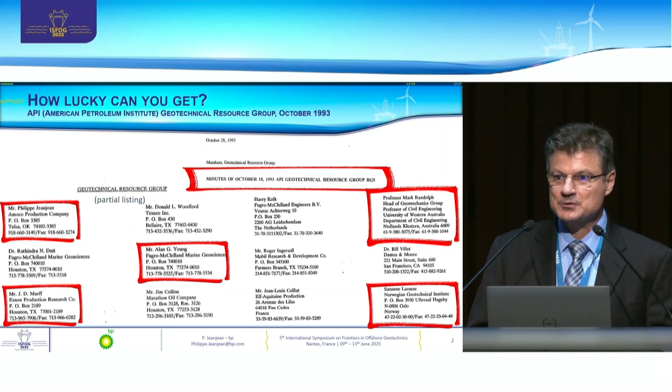So when I look back at my career, I realize how lucky I've been. You can see here a partial listing of the API Geotechnical Resource Group from October 1993. And here I was, 2 months into my career, sitting in meetings with Don Murff, Alan Young, Mark Randolph, and Suzanne Lacasse, who would all go on to be Terzaghi and/or Rankine and/or McClelland Lecturers. So it was really a wonderful learning opportunity.

I never worked with Mr. McClelland. It was a little bit before my time, but I'm proud to say I've worked closely with all the previous six McClelland lecturers. Don I met in 1990, as Phil mentioned, so tonight actually makes Don the first member of a very exclusive club, which is the people that got the McClelland Lecture and whose student got the McClelland Lecture. Mark and Alan I met in 1993, as I just explained. Knut I met in 1994 when he was leading a joint industry project on the design of suction piles. Ed I met in 1998 when he joined Amoco, just 1 week before the merger with BP was announced. And Richard I met in 1999 when he joined the ISO resource group on offshore geotechnics. So thank you all, gentlemen. It's been a pleasure working and learning from you over all those decades.

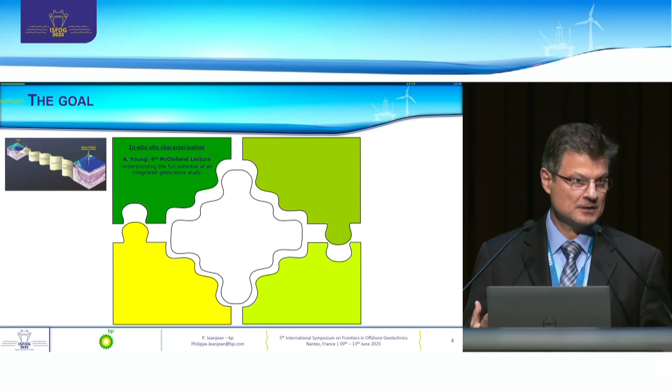So what is it that we do as geotechnical engineers, and what is our goal? In chronological order, we go into the field and do geotechnical and geophysical site investigation. We characterize the sites and take soil samples. Then we bring those samples to the lab and measure the soil properties relevant to our project. With those soil properties, we run numerical and analytical models to estimate the capacity of the foundation. And to verify and calibrate our design methods, we do physical testing, either in the centrifuge or at 1G, but rarely, if ever, full-size foundations with full-size loads.

All those topics have been covered in great detail in previous McClelland lectures. They are proxies for what we're really trying to do, which is predict the field performance of full-size foundations under full-size loads on the seafloor. So a fair question is, how well are we doing? Through this lecture, I will take you through some case histories to show that overall, we're doing very well if we follow the latest recommendations in our offshore codes and standards, although there are cases, as you will see, where we got it very wrong.

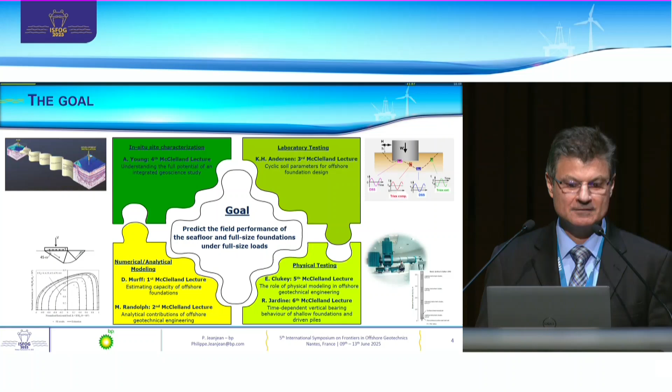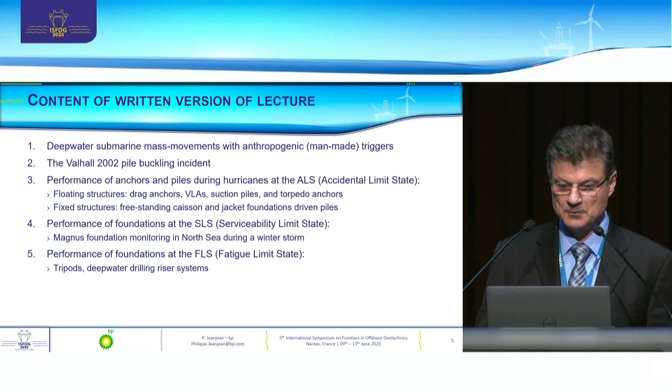This is the content of the written version of the lecture. We will talk about submarine mass movements with anthropogenic or man-made triggers. We'll talk about the Valhall pile buckling incident, and the performance of anchors and piles during the accidental limit state under very large loads imposed by hurricanes, for floating and fixed structures. Then we talk about the performance of foundations at the serviceability limit state, including the Magnus Foundation Monitoring Program in the North Sea. And then the performance of foundations at the fatigue limit state under very, very small loads. We can't cover everything tonight, so these are the topics we'll concentrate on, but there's more in the written version of the paper.

So let's start with offshore geohazards and submarine mass movements. If you look at the open literature, you will find that it focuses almost entirely on natural triggers.

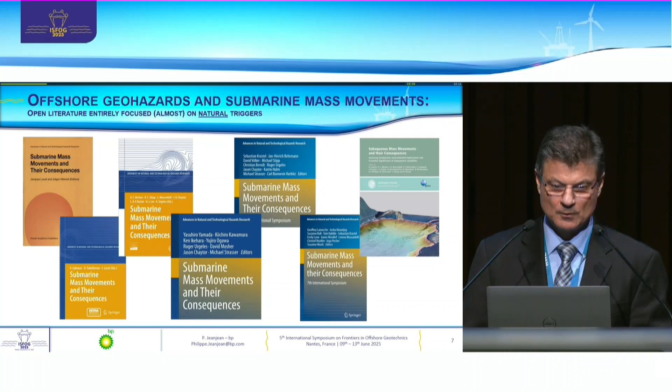Examples of submarine mass movement with anthropogenic triggers are virtually non-existent. So in this lecture, I will walk you through two case records, and the first one has to do with our drilling activities.

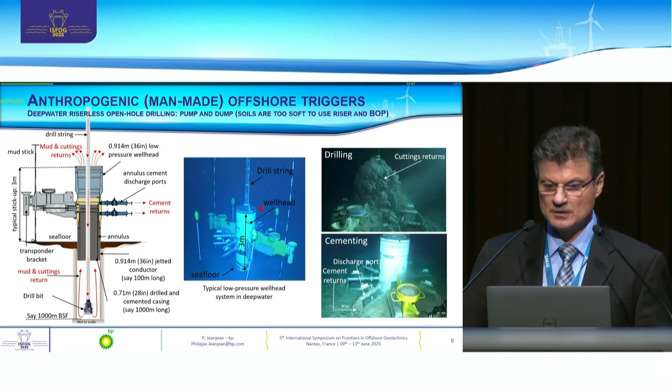You can see here a typical deepwater drilling system used in the shallow section of the well, in the top 1,000 meters, before the blowout preventer and riser are installed. The cuttings are circulated out of the hole by circulating mud in the drill pipe and returning the mud through the wellhead onto the seafloor. When drilling is completed, the casing is lowered and cemented, and the cement is returned to the seafloor through discharge ports. So those volumes of cuttings and cement can be very large.

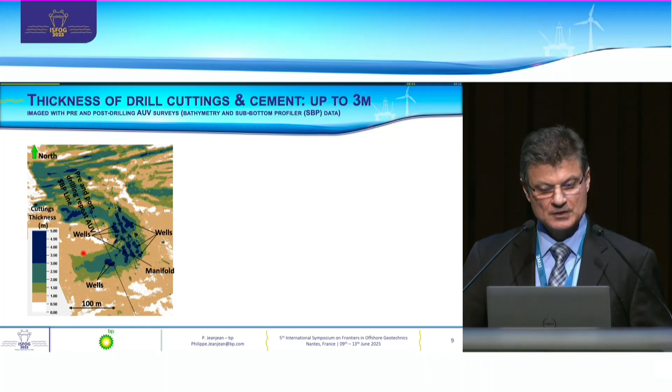So how do we know that? Well, we do bathymetry surveys pre and post drilling, and we compare the elevation of the seafloor, and the difference is the thickness of the cuttings. In this case record, all those dark blue dots are wells, and this is the thickness of the cuttings. Near the wellheads, you can see we have up to 3 meters of cuttings, and they can extend hundreds of meters away from the wellhead.

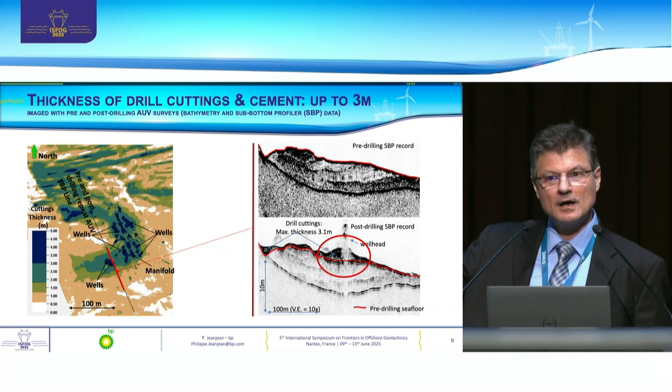Question: can those piles of cuttings be so soft and so high that they become unstable? The answer is yes, and here's a case record. You can see here a debris flow that was triggered by the accumulation of soft cuttings over the wellhead, the seafloor became unstable, and the cuttings ran out 260 meters.

We mapped the extent of the debris flow with what's called backscatter bathymetry data, and you can see here the debris flow is very visible. Locally, the slopes were up to 8 degrees, but it's a good idea to put subsea structures upslope of the wells, just in case you have one of those events.

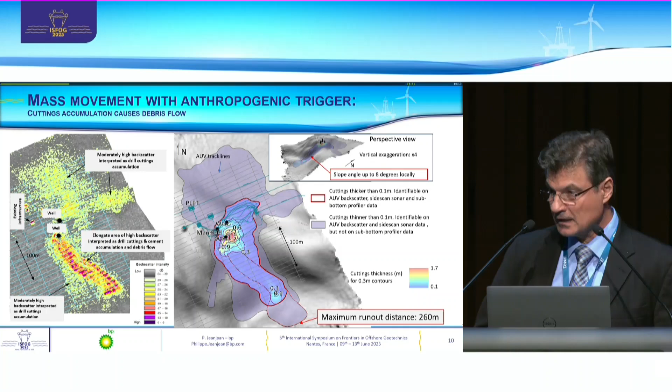We were fortunate, or unfortunate, I don't know, to capture the event live. You can see here a world premiere of a deepwater submarine mass movement with an anthropogenic trigger. You can see the drilling operation, and all of a sudden the seafloor becomes unstable, and the ROV is engulfed into the debris flow, which lasted about a couple of minutes and ran out a couple hundred meters.

If you slow down the video, you can actually see, I find it very fascinating, a cemented block intact being rafted over the debris flow. Here you can see the edge of a rafted block propagating onto the seafloor. Here's another one here.

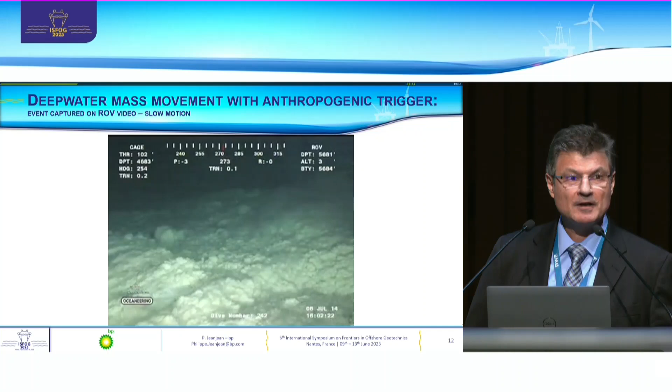Very spectacular, and those events can occur. The second example comes from another deepwater area. You can see the seafloor rendering here, and at first casual glance, it looks like a lot of the seafloor we've seen before. You have a bit of an escarpment, and yes, you have debris flows that have occurred.

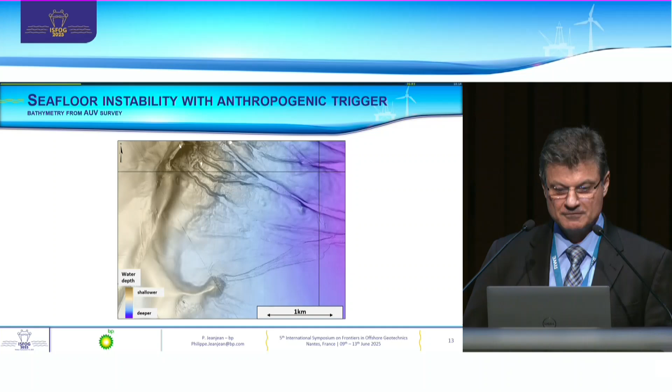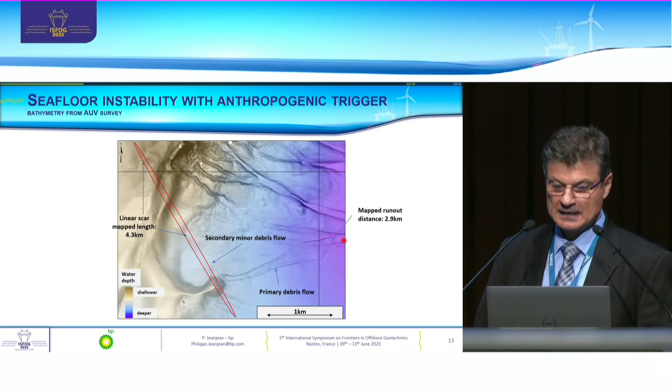But there is a very unusual feature about this seafloor, and here it is. We have this linear scar that we mapped over a length of 4.3 kilometers, but clearly it extends outside the bounds of the survey. It seems to be associated with 2 debris flows, which run out at least 2.9 kilometers. If you zoom in on this feature, you see the linear scar exactly coincides with the head wall scarp of the debris flows. And we don't think that's a coincidence.

We think the formation of the scar is what triggered the debris flow. And we believe that this scar is too straight to be the result of natural processes, and it's most probably of man-made nature.

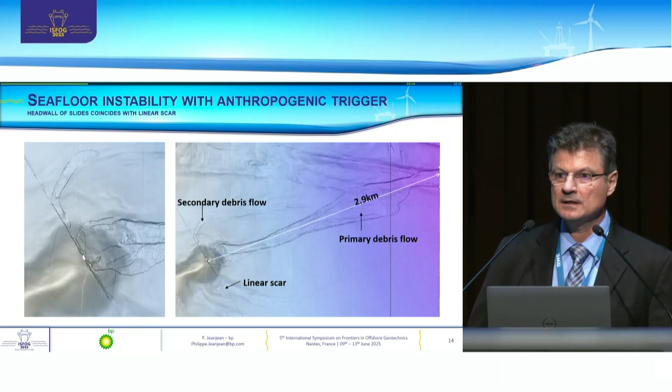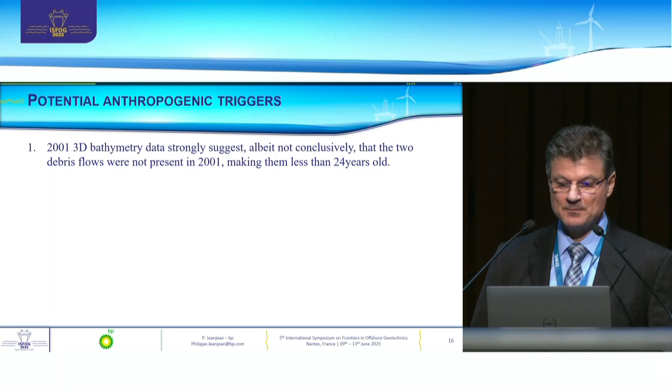So the plot thickens, because we have 3D exploration, low resolution bathymetry data from 2001, which strongly suggests, although we can't be 100% conclusive, that those two debris flows were not present in 2001, which makes them less than 24 years old. So what could it be that triggered those debris flows?

Well, it could be the laying of a cable or fiber optic line, but the scar is too big and too wide for that. It could be the dragging of a survey sled during a deep tow survey, but again the scar is too deep and too wide. In the Gulf of Mexico, pipelines were installed by being dragged along the seafloor, but those operations are well documented and outside the area of interest, so that's not it either. Or it could be the dragging of a drilling rig anchor after the rig broke its mooring, lost position, and drifted during a hurricane.

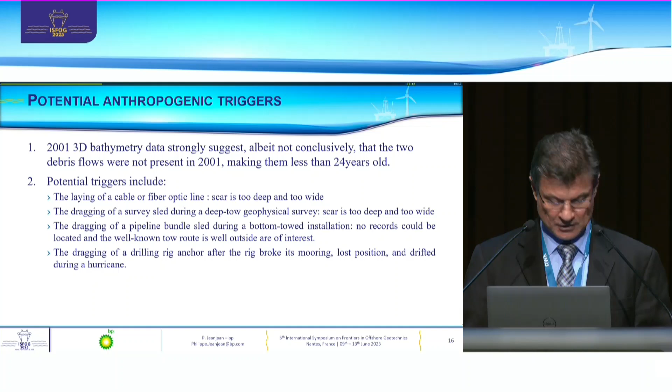So I think we can eliminate the first three possibilities, and that's as much as I can connect those dots together for you. I will leave you to draw your own conclusions.

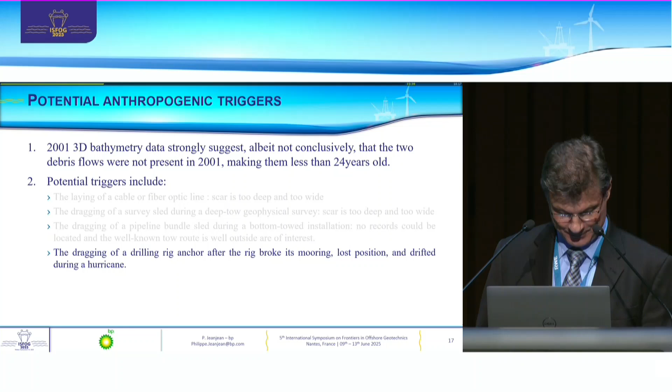So to summarize the bit about performance of the seafloor, we believe that case records of deep water mass movement with anthropogenic triggers are underrepresented in the open literature. They do exist. I've given you two examples, and I think we must have the courage to publish them. Again, they can be related to accumulation of drill cuttings or dragging of objects onto the seafloor. Now I appreciate all those lessons were learned during operations of oil and gas, hydrocarbons, but I do believe they are applicable to new energy projects.

For example, carbon capture projects can include the drilling of offshore wells to store the CO2, so you will have to deal with drill cuttings. Offshore floating wind, particularly in deep water, may have to lay a lot of cables on steep slopes with soft sediments. So you now have an example of what can happen during such activities.

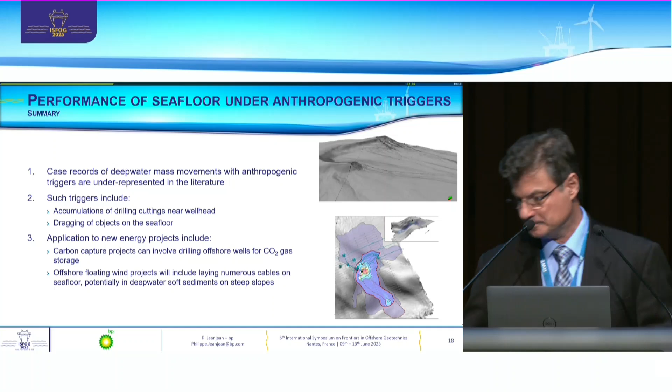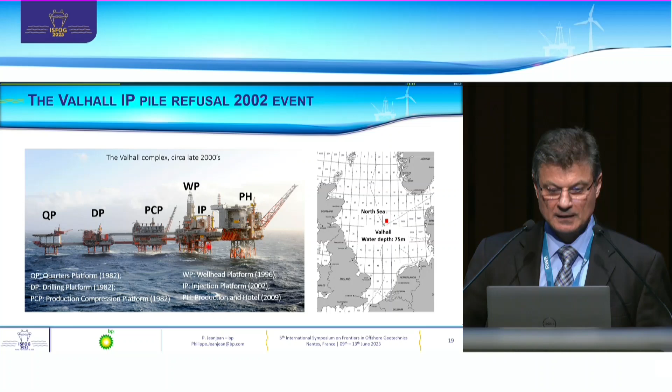So now we will pivot and look at pile performance during installation with the Valhall pile refusal event of 2002. The Valhall field is in the central North Sea. In the late 2000s, it included 6 bridge-linked platforms. We started in 1982 with the quarters, drilling and production compression platforms. We extended the field in 1996 with the wellhead platform, in 2002 with the injection platform, IP, and then in 2009. So we will talk about what happened when we installed the piles for the IP platform.

The ground model is fairly simple. You have 3 geological units: the Forth formation, which is mainly dense to very dense sand; underneath, the Fisher formation with hard to very hard silty clays interbedded with sands; and then the Ling Bank formation, which is predominantly very hard clays.

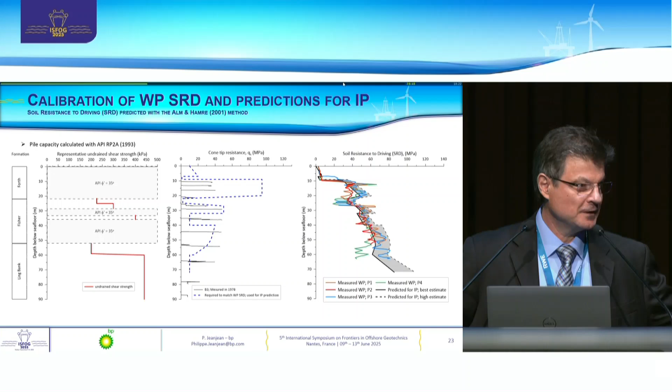You can see how physically close those two platforms are. At WP, we installed piles successfully up to 63 meters. But when we installed the pile at the IP platform, 5 out of 8 refused, between 13 and 23 meters short of penetration. That was a big surprise. The installation was aborted, the topside was not installed, the heavy lift barge was sent away, and that's how the IP platform was left in the field.

Edge to edge, those two piles are just 4 meters away. How could it be that we successfully installed piles with the same diameter, and then a few years later we get in big trouble and refuse those two piles here?

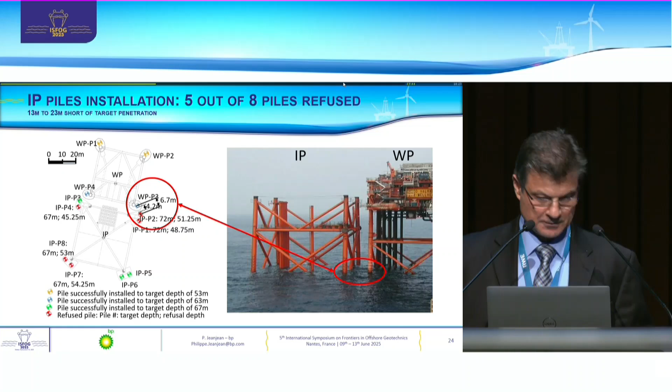If you look at the SRD, you see the ones in blue for the WP platform, that's non-refuse. Then you see the SRD for the piles that refused at this corner. For some reason, in the Fisher formation, the SRD starts to increase until it reaches about 130 MPa, and then the pile just refuses. How could that be? Why is that?

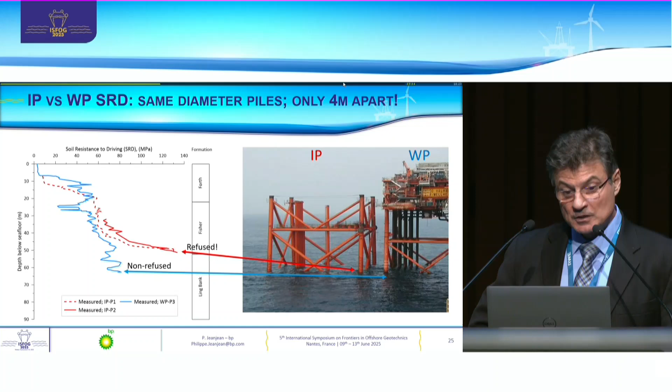So we recalibrated the Alm & Hamre method to try to match what we had observed. Here is the SRD we measured, and this is our original prediction. Even the 2 out of 3 piles that did not refuse had SRD much higher than what we had calculated. So you can recalibrate Alm & Hamre and match what you've observed, and here is our updated prediction post-refusal. But to do that, you have to increase the input cone tip resistance in the lower Fisher formation by a factor of at least 3 compared to what we had at WP, if you use the Alm & Hamre method.

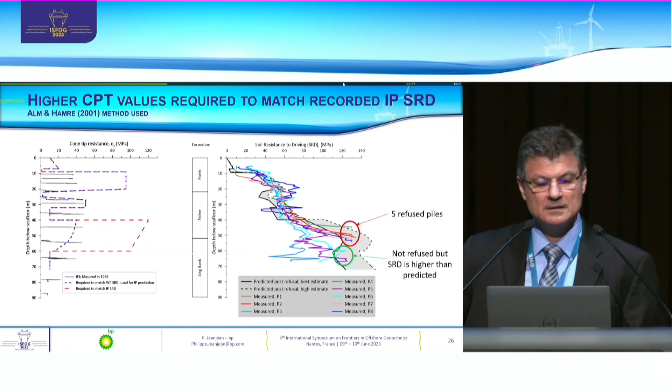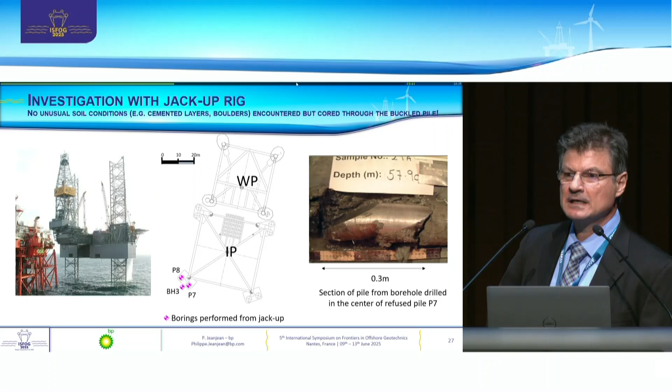So you can clean the pile, send a downhole sonar, and generate the shape, the geometry of the pile. For pile P7, the cross-section was heavily deformed in the bottom 4 diameters, with evidence of buckling as high as 8 diameters from the tip.

P8, interestingly, buckled in a different manner. The cross-section remained intact almost all the way down to the tip. Based on video camera evidence, we know it buckled only inwardly, only in the last half a diameter. So it's a lot of fun.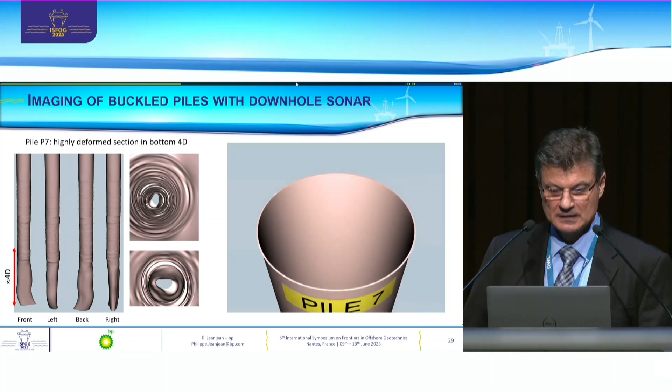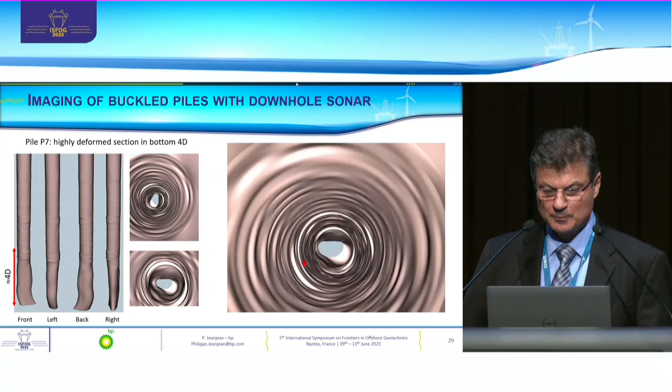You can see what it looks like going down pile 7. The top of the pile is not buckled, there's no deformation. But once you get 8 diameters above the tip, you see some evidence of buckling, and then going further down the pile, at 4 diameters, that's where it starts to be very heavily deformed.

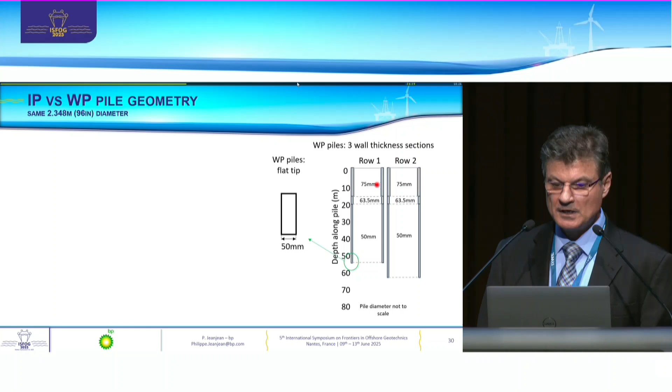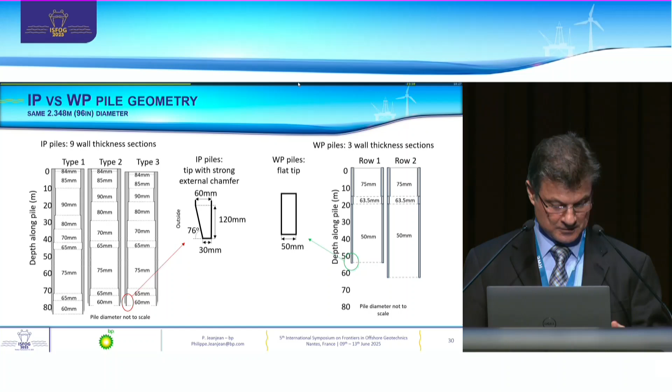So it's not the soil. The difference between WP and IP is not the soil. So maybe it's the pile structural design. Here is the wall thickness schedule for the WP pile: very simple, 3 wall thickness sections, flat tip, which was standard design for Amoco in the North Sea in the 90s. By contrast, IP had a very optimized wall thickness section with 9 wall thickness sections. The wall thickness goes up and down and up and down. And critically, it had a steep external chamfer of 76 degrees. So those are the structural differences between the two piles.

We asked ourselves, well, it's not the first time a pile refused in the North Sea, so let's look at the database of what happened. We put together a database of all the platforms installed by 2003 in the North Sea, and found 188 platforms, 72 of them with piles, mostly in dense sand. We found that the strong external chamfer was actually used in 40% of the platforms.

But actually in the Norwegian sector, it's almost 2 out of 3 platforms that had strong external chamfers. So if you look at the database and plot the depth below the seafloor against the diameter to wall thickness ratio, the D/T, you get this scatter plot. The green data is for piles that did not refuse, and the red data is for piles that refused, including the Valhall case.

The D/T for Valhall is well within industry practice, and D/T has nothing to do with the probability of refusing a pile. You can refuse a pile with a D/T as low as 20. D/T has more to do with fatigue considerations rather than refusal and buckling considerations.

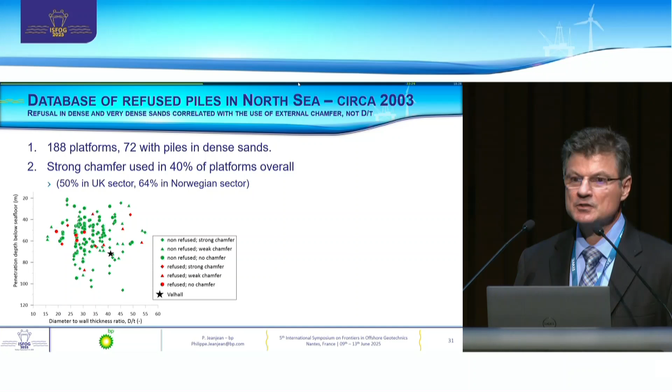So how do you make sense of all this data? Well, you have to sort it by chamfer, and that's where things become very clear.

If you look at platforms with a strong external chamfer, we had 16 platforms in our database, and 5 had at least 1 pile that refused, which is 31%. With a weak chamfer, out of 20 platforms, 3 had at least 1 pile refuse, 15%. Even with a flat tip, out of 35 platforms, 3 had 1 pile refuse, still 10%.

This is perhaps the most important table of the lecture. This was an eye-opening, watershed moment for the project, because in those days, nobody in the industry realized the correlation between using an external chamfer and the increased occurrence of pile refusal.

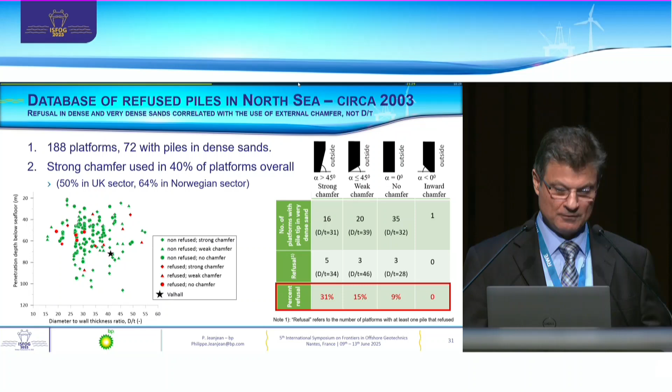So you might ask yourself, why use an external chamfer in the first place? Well, in 2003, you can see the reasons invoked by designers: to aid pile stabbing into the pile sleeve, to preserve pile verticality with sloping strata, to ease penetration in dense soil compared to a flat tip, or to reduce the risk of plugging by moving more soil on the outside than the inside of the pile.

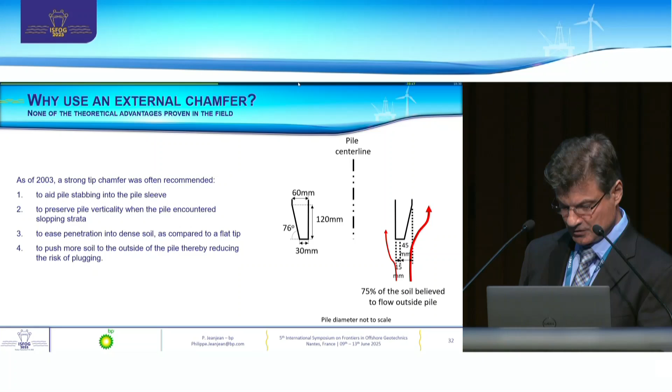However, we had very experienced pile installers in the investigation team, and they said they could not corroborate any of those theoretical advantages based on their decades of installation experience. So none of the theoretical advantages could actually be proven in the field.

So we had established correlation between a chamfer and the risk of pile refusal and pile buckling, and now we asked ourselves, could we establish causation?

So we did numerical analysis, and the first method we used was the one that would eventually be published by Aldridge et al. in 2005. The math is in the paper, but you can assume a size of defect and calculate the cone tip resistance at which yielding of the pile will start. For our problem, we calculated 113 MPa.

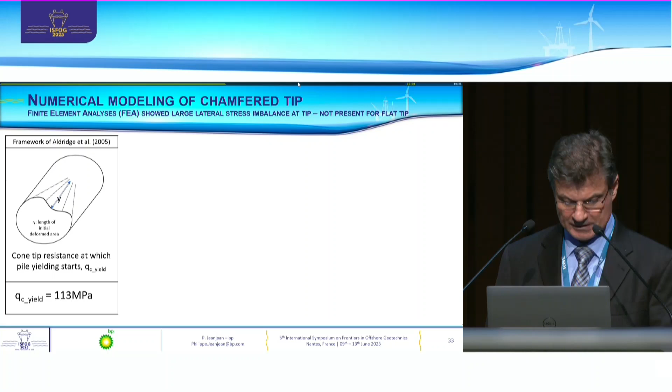We also did a lot of finite element analysis using a variety of software: Abaqus, LS-DYNA, Plaxis, ICFEP, and they all showed the same thing. At the tip of the pile, you had a strong stress imbalance if you had a chamfer. This stress imbalance, shown as fractions of P, is proportional to the cone resistance. This stress imbalance was not seen with a flat square tip.

So you can see an example of buckling patterns, and perhaps that's what happened in pile 8, where you have internal buckling over half a diameter of the pile.

But maybe the pressure around the perimeter of the pile is not uniform. Maybe you have sloping strata. So if you double the resistance on half the perimeter, you get a different buckling pattern, and you can calculate a cone resistance somewhere between 105 and 70 MPa that would cause the pile to start yielding.

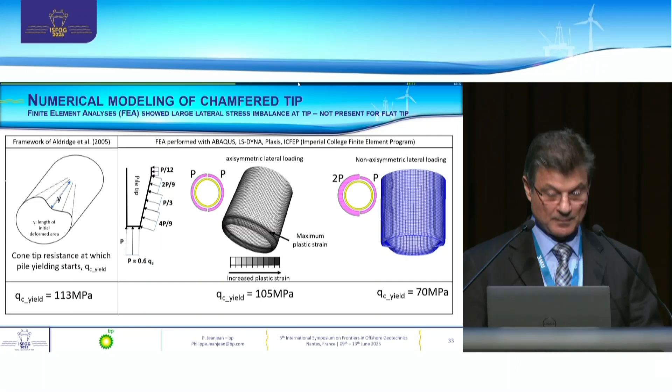Here is another analysis using Abaqus and the BASIL user element. You can see how the stress imbalance is modeled. We calculated 90 MPa to cause the pile to yield. In this simulation, when the pile is at 50 meters, the analysis predicts yielding here. The area in gray is above yield over 4.3 diameters, which is reasonable based on the images I showed you from the downhole sonar.

You can also track how the pile deforms as it enters various strata. You start with a little difference in diameter, a bit of ovality, and this red line tracks how much this red point goes down, while this blue line tracks how much this blue point goes out. So the cross-section flattens in the sand, then stays stable in the interbedded sands and clays, and once you get to the deeper sands, the cross-section really flattens and the pile refuses. All of these analyses are fairly consistent with the observations we had.

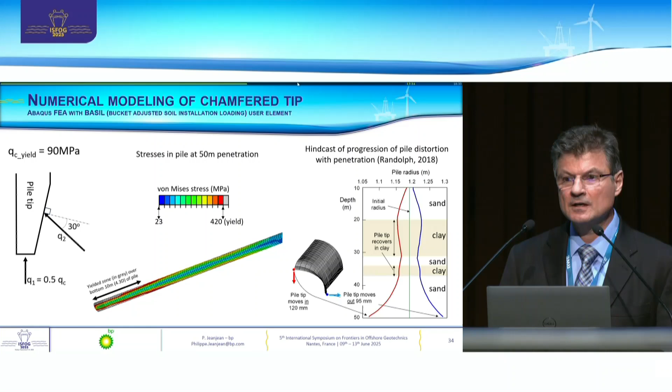So what are the causes of the IP pile refusal and buckling? As often in those cases, you have two sides, two independent panels. There you have two versions of the truth, two versions of what happened.

We set up two investigation panels in a Delphi-type situation, meaning every so often, every few months, those two panels had to meet, and each panel had to listen to the arguments and conclusions to date of the other panel, and figure out what it meant for their own investigation. The goal is to obtain consensus between those two panels, which I'm happy to report we did get in the end.

So not in order of importance, but that's kind of the recipe for a perfect storm: you need a steeply chamfered pile tip, a sand layer of sufficient density and stiffness, a sand layer of sufficient thickness, and an initial defect, an out-of-roundness or a pile deformation, when you enter the very dense sand.

Now, it's fair to mention that in all those numerical analyses, those pretty diagrams I showed you, to get there we had to put initial defects that were larger than what we measured on the piles. All those piles were manufactured within code tolerances. On the other hand, all the analyses we did were static analysis, so they don't capture the dynamic aspect of pile driving. So maybe we have compensating assumptions in our analysis.

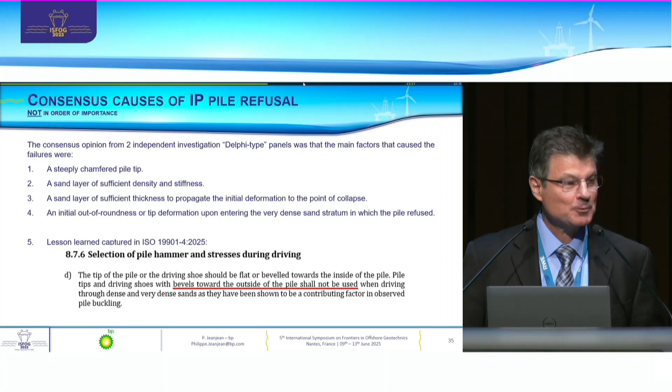So if you read the code and wonder why this 'shall' statement is there, now you know. And if you choose to ignore it because you don't have to follow ISO, well, caveat emptor, as the Romans used to say — buyer beware.

So how did we remedy the situation? We installed what's called a piggyback system. You can see here we installed two insert piles in the piles that had buckled to get the right wall thickness at the right elevation, and we added one more pile through a pile sleeve at each of the corners. You can see the topsides being successfully installed on the platform with a one-year delay.

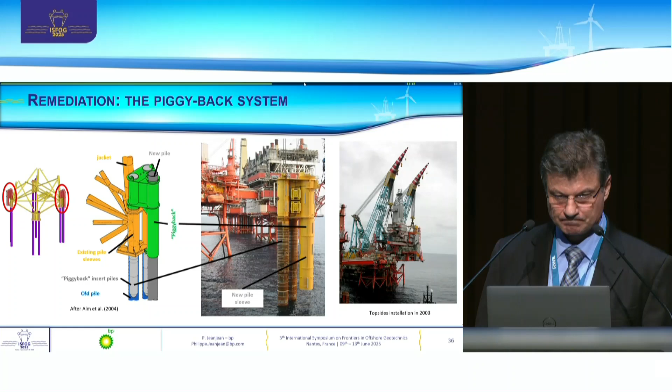So when it came time to design the next platform, do you think we took a few soil borings with modern techniques? Yes, we did. Here are all the CPT records from the 2004 site investigation. Even with modern techniques, we still refused at 120, 130, 140 MPa. So we have extremely dense sand, very shallow.

If you recall, I told you we calculated a cone resistance somewhere between 70 and 113 MPa to start yielding the pile. So yes, it is possible that, as the finite element analysis showed, the pile may have started to yield and buckle in the upper sand, and then finally refused in the lower sand. But it's interesting to see the difference in assumptions you have to make to predict the right SRD.

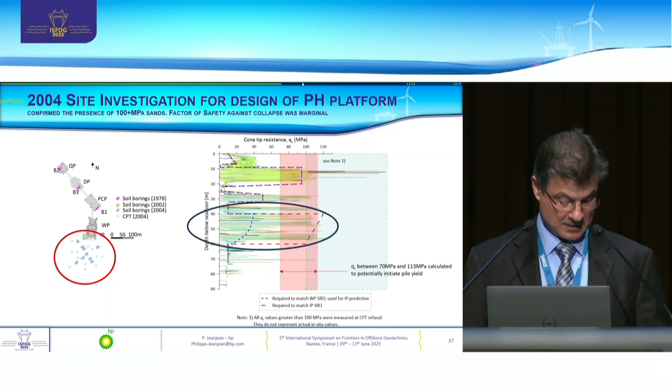This is the flat tip, this is the high bevel, and it's the same sand in the two locations. So this was the story of the Valhall pile buckling in all the gory details. So now you can't say you didn't know.

We're going to pivot now and talk about the scientific method, at least according to Professor Richard Feynman, Nobel Prize winner in physics in 1965. According to him, it involves three steps: you develop or guess the theory, you compute the consequences of the theory, and then you compare those consequences to experiment.

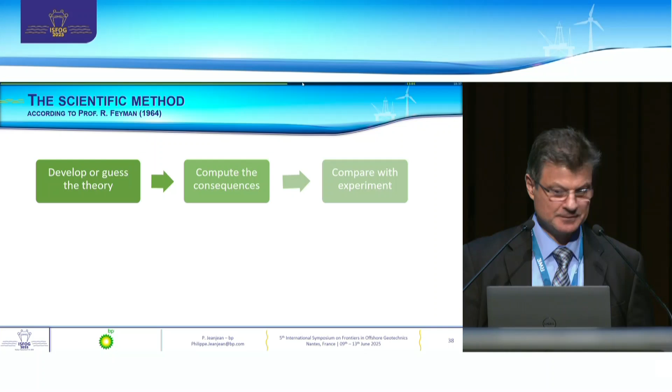For us, that means we develop foundation design methods, we predict the field performance of the structure and the foundation, and then we compare with post-event observations. Tonight we'll compare with post-hurricane observations.

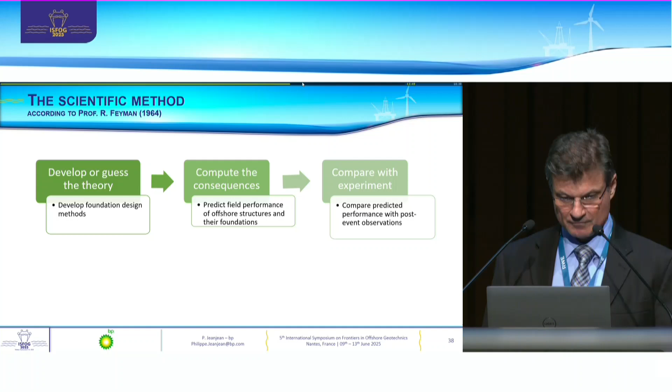Can you prove a theory wrong? Yes. If the results of the experiment disagree with the predictions of the theory, it doesn't matter what your name is, it doesn't matter how pretty your equations are — the theory is wrong.

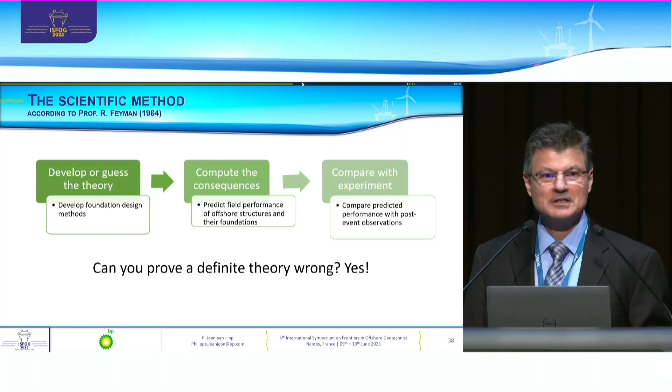The question is, can you prove a theory right? Let's see what Professor Feynman's perspective is on this particular point. Suppose that you invent a good guess, calculate the consequences, and discover that every consequence you calculate agrees with experiment. Is the theory then right? No, it is simply...

To do justice, I'm going to start the video again. Oops, if I can.

Suppose that you invent a good guess, calculate the consequences, and discover that every consequence you calculate agrees with experiment. Is the theory then right? No, it is simply not proved wrong. Because in the future there could be a wider range of experiments, you can compute a wider range of consequences, and you may discover then that the thing is wrong.

So if you adopt this point of view, it makes you, which I have, very humble, because you can never be sure that you are right. You can only be sure that you are wrong.

So through the rest of the lecture, I will walk you through some case histories that show you that the design methods we have now in our codes and standards, if you use the latest one, have not been proved wrong by the performance of offshore foundations under hurricane loads.

So we will start looking at floating rigs and mooring anchors. You can see here in the 2000s there were a variety of hurricanes that came through the Gulf of Mexico, and in particular for Katrina, this was the first time drilling rigs were subjected to Category 5 hurricanes. You can see that each of those hurricanes caused mooring to fail.

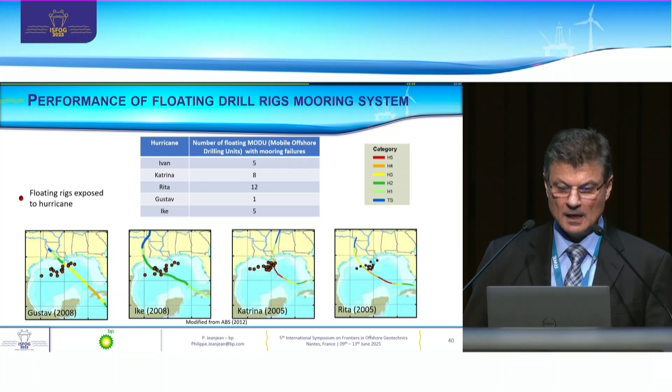In particular, for Hurricane Ivan, you can see the path of the eye of the hurricane that went right over Mississippi Canyon Block 383, where the Jim Thompson drilling rig was drilling. Our hindcast analysis showed that when the mooring began to fail, the return period of the waves was somewhere between 100 to 1,000 years, so huge waves. In those days, you only had to design to a 10-year event for mobile temporary mooring systems.

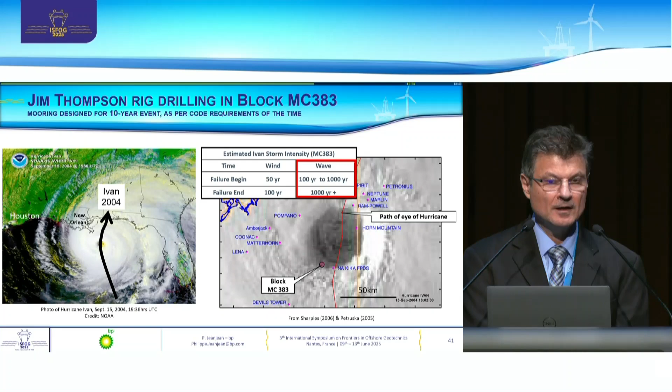So you would expect some mooring lines to fail, which they did. All of the mooring lines failed. Five of them failed within the wire itself or at the fair lead, which is what we would expect, because the fair lead is where the line tension is maximum. However, you can see that 4 lines broke at the suction pile, at the pad eye.

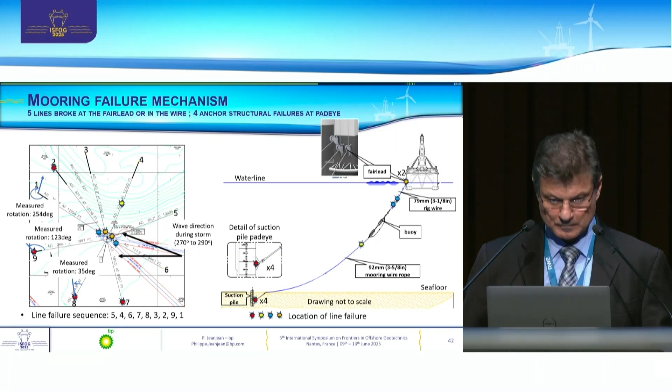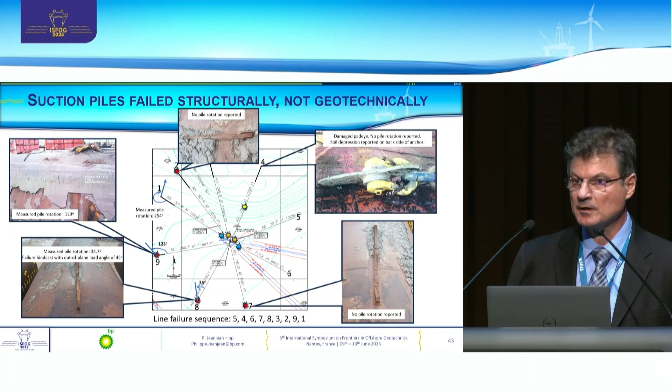Can we explain this performance? Does it make sense? Is it consistent with our predictions of the theory? So what you can do is, if you look at inline loading first, you can develop interaction diagrams with the vertical ultimate load and the horizontal limit load as a function of various adhesion factors.

So you can see those diagrams here, and you also have to put the breaking strength of the mooring line, because the load cannot exceed the breaking strength in any direction. Remember, those suction anchors are not designed for a particular location. They must be able to work all around the Gulf of Mexico, so they're designed for low estimate soil properties.

And then you do the hindcast, you do the time domain analysis, and for lines 3 and 5, which broke in the wire, you can see that the load will reach the breaking strength of the wire before it reaches the capacity of the anchor. So it makes sense that the line breaks and the anchor does not pull out of the ground.

Now you can also look at out-of-plane loading, and you can draw this interaction diagram. You have the line tension, which cannot be more than the breaking strength of the wire, and then you have the geotechnical torsional capacity using adhesion factors of 0.75 and 0.55. So this is the range of torsional capacity of the anchor geotechnically.

And then you do the time domain analysis, and for the 4 lines that broke at the pad eye, the end of the arrow is when the pad eye breaks. At every step of the analysis, you have to do a finite element analysis of the pad eye, and when you calculate the stresses above yield, that's when the pad eye breaks.

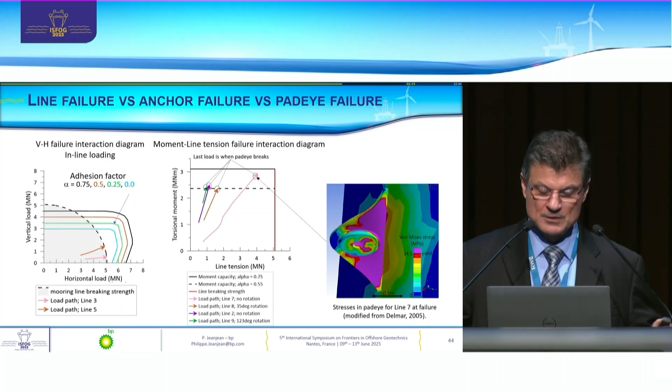So you can see first, it makes sense that the line didn't break because none of those loads reached the breaking strength of the wire. And some of those anchors rotated, some did not, which tells us that the torsional capacity of the anchor was pretty close to the structural capacity of the pad eye. So whether there was rotation or not, it's tough to tell. But overall, the results are, we can explain this with our design methods.

Another type of anchor that was put to the test is the OmniMax anchor. It's a gravity-installed anchor. It is deployed, the mooring line deployment line is severed, and the anchor self-embeds into the seabed under gravity. It has a swiveling mooring arm, so in theory, the capacity of the anchor is independent of the azimuth of the load. By playing with the top fin and bottom fin area, you can ensure that the anchor will dive when it's loaded beyond its capacity.

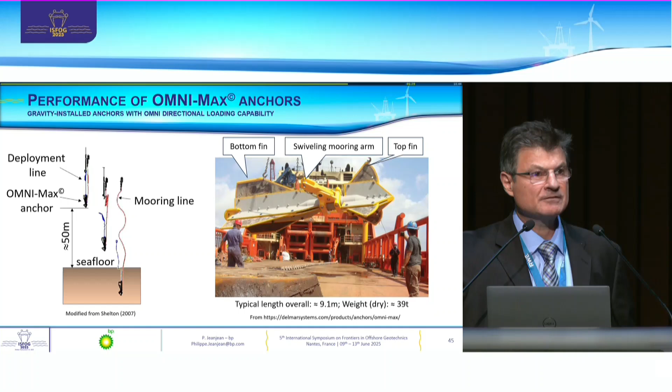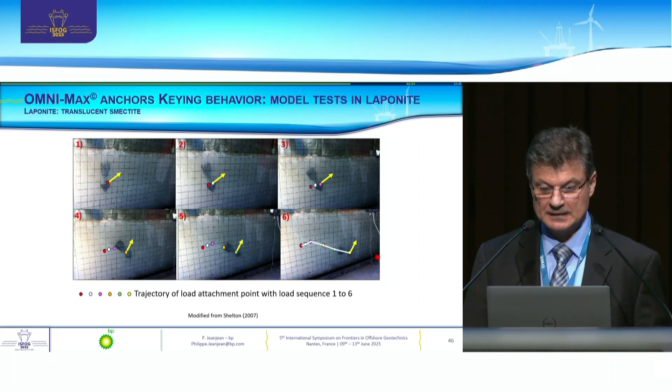That's the theory. During the development of the anchor, there were tests done in Laponite, and you can see that as you increase the load, the anchor keys itself perpendicular to the load, and the load attachment point dives deeper. That's the theory. So there was one rig that was moored with OMNI-Max anchors, and during Hurricane Gustav, all the mooring lines broke except for one.

So, in summary, for a floating system and anchors, the design methods have not been proved wrong. Most mooring failures occur at the waterline, which is what we want, what we intend. For suction anchors, we can predict where the line fails, or the anchor fails structurally, or the anchor fails geotechnically. And we haven't seen that yet. We have seen no geotechnical failures yet, but we can explain that.

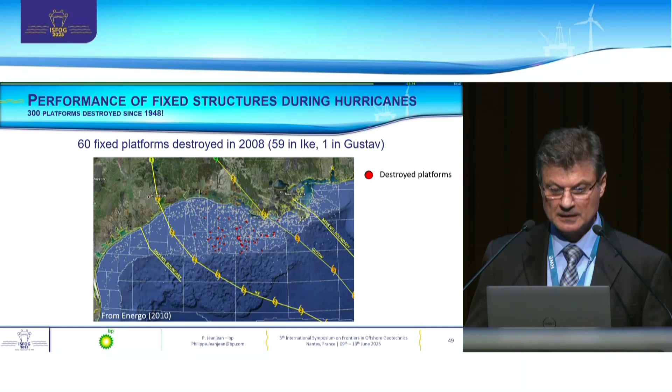So when we say destroyed platform, either the platform is laying on the seafloor with the foundation most of the time intact, or it's damaged beyond repair with severely buckled members, or it's leaning at the waterline beyond repair. So all three of those structures would be called destroyed.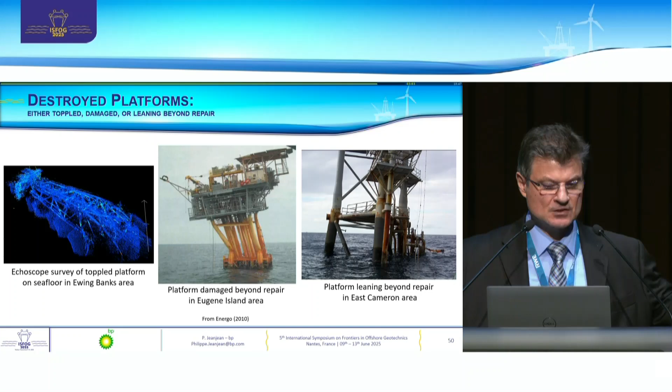So we funded a study with API, and I'm going to show you two case records. The first one is a freestanding caisson that was damaged during Hurricane Andrew, and it's a very simple structure. You have one conductor, one pile, 29 meters into soft clays, and very shallow water depth. It was found leaning 15 degrees at the waterline.

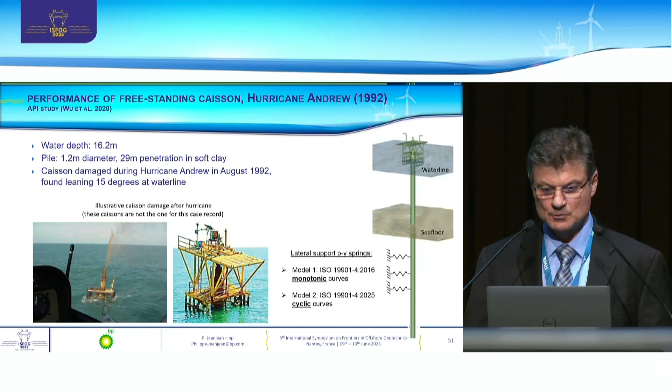So you can do dynamic pushover analysis, and to derive those curves you have to use the DSS shear strengths - that's the shear strength measured under direct simple shear. That's now in ISO. So you can see the time domain analysis.

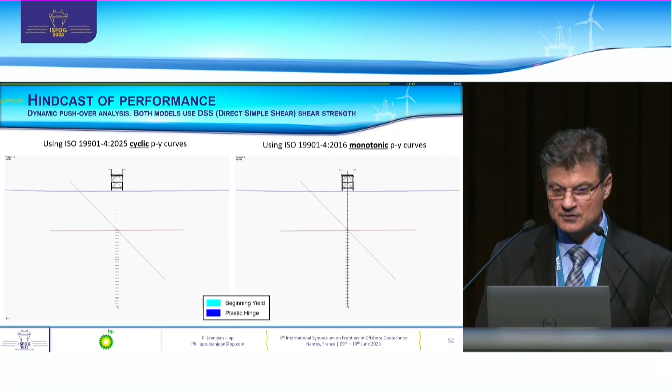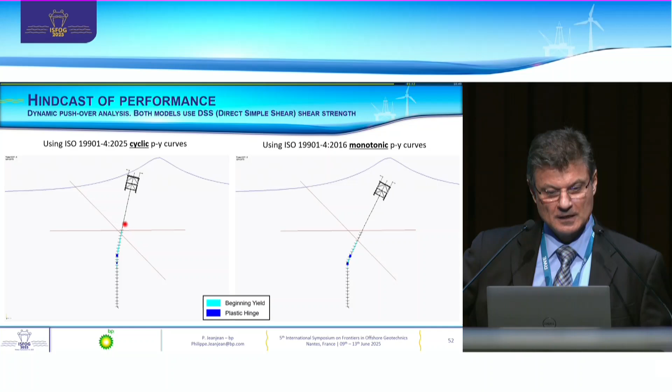The wave comes and submerges the topsides because we're in such shallow water. With the old curve, you see very early formation of a plastic hinge, and you don't see too much yielding in the pile because the PY curves are so soft they can't mobilize any stresses in the pile. With the new curves, you see the plastic hinges slightly higher, and much more yielding in the pile because the PY curves are stronger and can mobilize stresses in the pile. And obviously, the caisson leans less with the new curves.

At the end of the simulation, this is what you predict. You predict a final leaning angle of 34 degrees using the old API Matlock curves, and 16 degrees using the new 2025 ISO curves - and the field observation was 15 degrees. So the new design method, again, has not been proved wrong with the performance of this caisson.

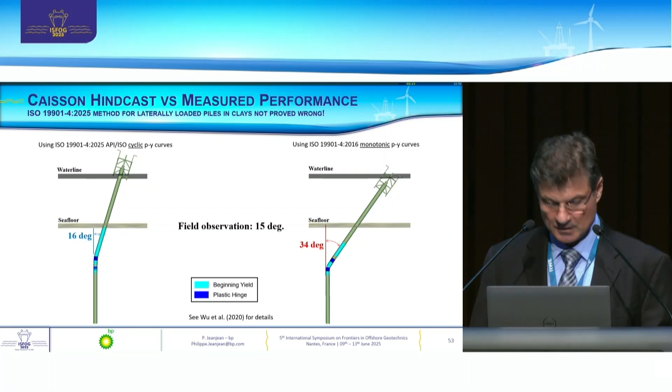Now here's another case record, the second case record. This is a jacket in the Ship Shoal area that was damaged during Hurricane Ike. Again, we're lucky - it's a very simple structure. There's no conductor, so one pile per corner. Again, 55 meters into soft and stiff clays. And the original structure was the one damaged.

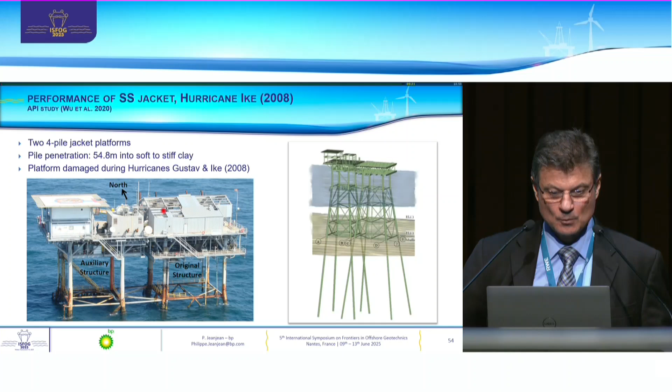So what kind of damage did we see? Well, close to the water line, we saw joint failures and separated members. A little further down the jacket, you can see buckled braces - you can see the bowed shape of those struts. So they buckled under compression load during the event. A little further down, you can see joints that cracked and were damaged under compression loads. And very importantly for us geotechnical engineers, for the foundation, there were no indications of pile foundation failure or even lateral displacement in any of the underwater inspections.

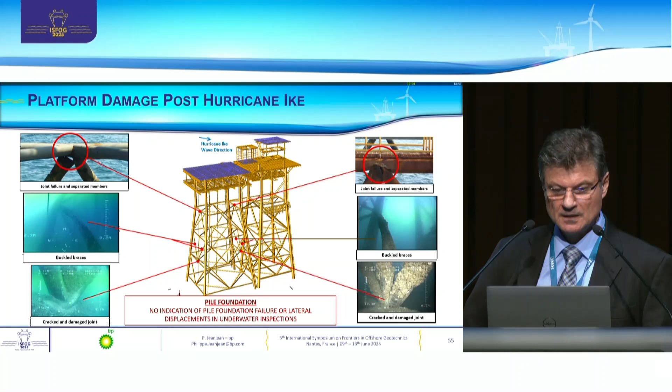So you can do the same thing as before. You can generate two structural models, similar in all aspects except for the PY curves. With the old API curves, you see a lot of plastic hinging and some buckled struts. With the new 2025 curves, you see no hinging, a little bit of yield, and more damage into the jacket itself - and that's very typical. With the new curves, you will predict less pile damage, more damage in the structural truss.

If you look at the pile head lateral displacement during the event, with the new curves, after two cycles, you predict maybe 0.1 meter of permanent displacement. With the old curves, you predict 0.4. So what we say is the hindcast with the new 2025 cyclic curve is more consistent with the fact that we actually couldn't see anything in the underwater inspections.

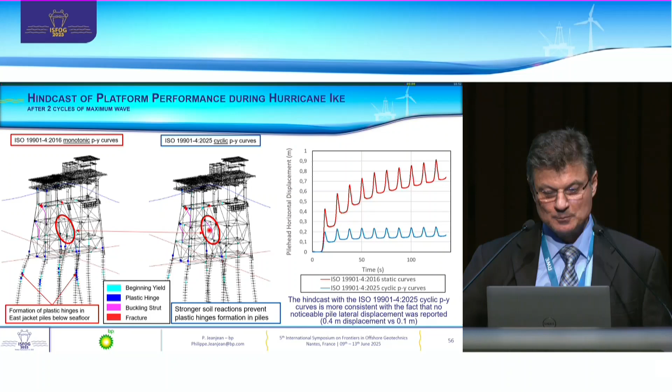So there's a difference in the predicted structural performance. The new curve predicts this member to be buckled, and the old curves do not. So did it buckle? Yes. This buckled member that is only predicted with the new p-y curves - here it is. That's proof. There's no arguing.

And additionally, the fact that there's no yield, no plastic hinging, and very little yield in the pile is again consistent with the fact that there were no measurable displacements at the pile head. So again, what we say is that the new design methods have not been proved wrong with the performance of those jackets post-hurricane, and we are able to match damage that we can actually observe.

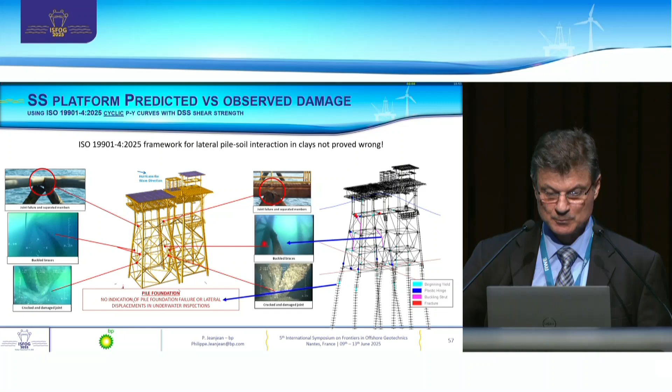So it is really of the utmost importance to identify the right failure mechanism, because if the jacket is not fit for purpose, if you have to retrofit it, if you have to repair it, you will send divers into the water with non-trivial HSSE risks. So we owe it to all those people that whatever repair and strengthening they do is meaningful and impactful.

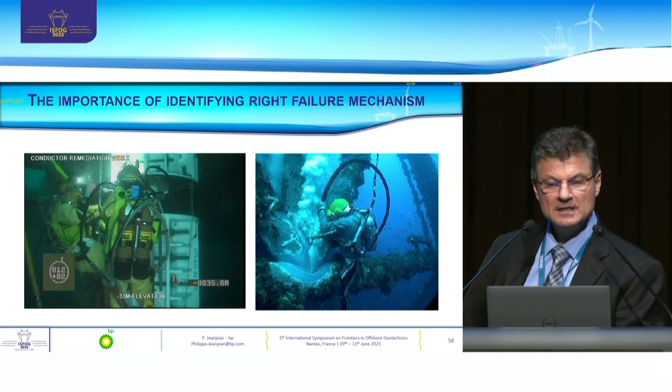Now, in closing, I will say that I'm aware that all those lessons were learned during the production of hydrocarbons, but I trust you will agree with me that they are transferable to new energy projects. The structures are the same, the type of structures are the same. Yes, the scale varies, the number of structures that we put varies. Yes, there are differences between a freestanding caisson and a monopile.

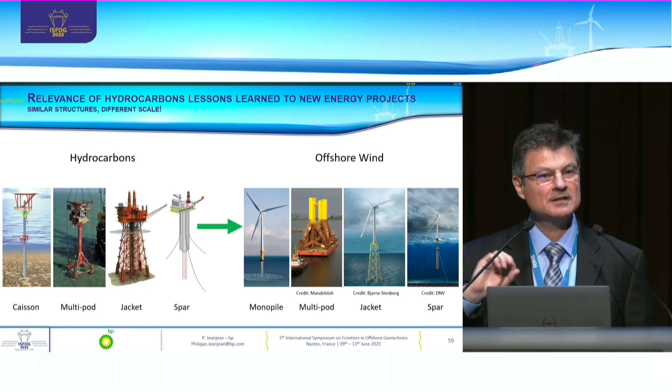So I didn't say blindly apply the oil and gas lessons learned to offshore wind. I say they are transferable. And with this, I thank you for being here tonight.